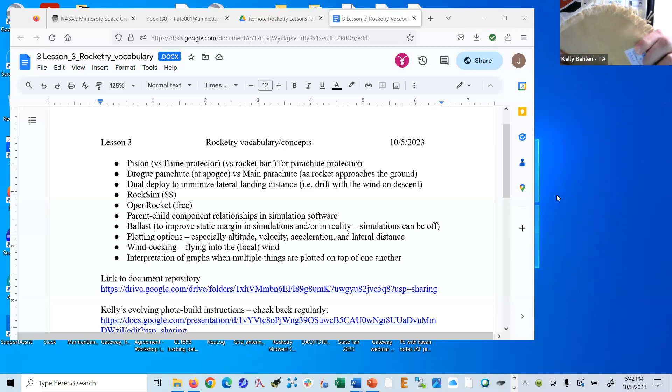You know, I actually have a flame shield right in front of me here that ejected at 1,000 feet per second velocity, and it barely survived. It ripped the whole outer diameter of this thing apart. You can imagine this is really, really strong. You can imagine what happened to the parachute. I suspect the parachute is not in as good shape as that. It's in multiple pieces. Okay, fair enough. Not a good idea to pull parachutes when you're traveling at high speeds.

We're going to try and pull one parachute at apogee, when you're hopefully not traveling fast at all, maybe even zero, although you're almost always tipped over and going sideways a little bit. And then pull our second parachute before we reach the ground, but make sure that the drogue parachute is at least big enough to give us a chance to get the main out without breaking something.

Hey, Professor Flaten. Go ahead.

I imagine if a rocket is traveling horizontally at high speeds, that is a bad thing. And it also might end up hitting the ground at a high speed, which would be a bad thing. Like, wouldn't deploying a parachute, even if it's not intentional, wouldn't anything to get it to slow down and not hurt people and land more gently be a positive? Okay, that's looking at the glass half full instead of half empty or something like that.

But okay, what's going to happen is you're traveling sideways. You shouldn't be traveling sideways at high speeds. That's called a missile, not a rocket. But if it happens, it's true. What does NASA do if their rockets are not rockets but missiles? They send a self-destruct command. And that's kind of what pulling a parachute does, is it makes the rocket blow up or into pieces.

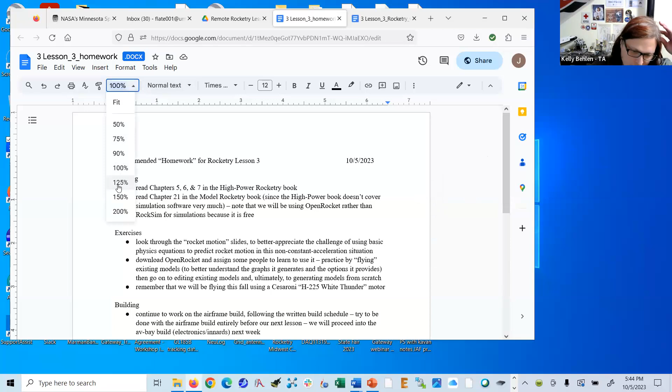Yeah, we had a motor failure where the motor kicked out. It turned over like it was at apogee, and then the motor started burning again. Motor started up at maybe 400 or 500 feet. When it hit the ground, it buried the nose cone about 8 inches in the ground, and it shortened the rocket by about a foot. So you always want to try to keep these things pointed up.

On the other hand, if you don't manage to get a parachute out, it will come down gravitationally at a very high speed, and we call that a lawn dart. I remember one lawn dart that literally disappeared underground, but there was a beeper on it, and we found it by going around and looking for what part of the ground was beeping. That was impressive. We got the rocket back. It was not in good shape, but we dug it out.

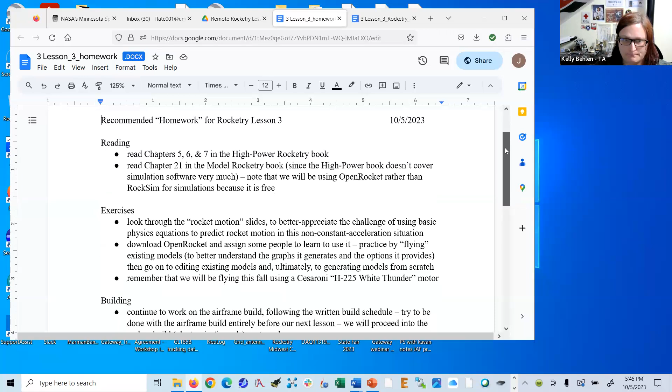It was fully underground. We found 7 pieces of one of these, and we only recovered half of it. So that gives you an idea of the kinetic forces. That's why they tell you to never try to catch a rocket coming down also, because it can hurt you quite bad. Okay, pressing on, and then I'm going to turn this over to Kelly to give us an update, and then I'm going to do some theory.

So here we go. For reading, there's several chapters in the High Power Rocketry book I want you to look at, and also chapter 21 in the Model Rocketry book. That's the chapter on simulations, although it's not Open Rocket, but RockSim. It's similar. For exercises, I'm going to show you some rocket motion slides very quickly. I would encourage you to spend more time than I do tonight looking those over.

And then get a copy of Open Rocket, download it, get some people on your team, maybe more than one, to practice using it. And we're going to develop the beginnings of a simulation model of your rocket. And the homework more or less for this week is going to be take that model and make it look like your real rocket and show us in about a week's time how it's going. We will be flying with a Cesaroni H225 motor, and so that's the motor we'll be putting into our simulations.

As far as build, you should be building your airframe, and we're going to start building the AV bay next week, so it would really be nice if the airframe was essentially done, or close to done at least, before next week. That's all I got as far as homework and vocabulary concepts, so that was actually very quick. And I'm going to stop sharing and turn this over to Kelly for a build update.

Is screen sharing enabled for me? Here's what I'll do. I will spotlight you. Okay. I need you to turn on screen sharing so I can show them Open Rocket. Oh, if you click on screen sharing, it doesn't let you? Yeah, it's disabled by you. You have to enable it. That's bad because I don't remember how to do that. Anybody? It should be on the little taskbar down there. There should be a little chevron that you click, and it says enable screen sharing for all participants. I'm looking.

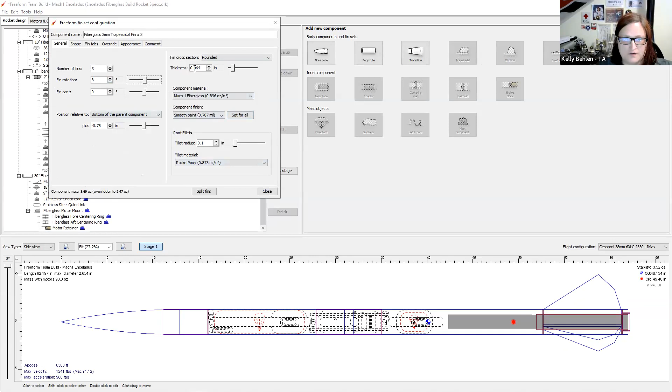Where you're really going to see a lot of this stuff is in the thickness of your fins, the fillet of your fins, what material you're using, and whether you rounded it, squared it, or had an airfoil on the front of your fins. And the last thing you're going to see in this program is where you actually design your fin. So that's going to be important.

You're going to need to get not the root edge, but the root edge of the exposed part of the fin. You're going to need to find out where that starts, where that ends, and the XY coordinates of all of the parts. You'll see them over here. I had this in millimeters because the kit was in millimeters. So you'll see that there's slight variations, but typically it's 6, 3.7. And that's how you're going to track your fins.

When you go over to the third tab here, fin tabs, this is where you're going to change the length of your fin tab and how tall they are inside of the body. So you're really going to just do the top 3 here. You're going to put in your general information about numbers. You're going to shape it out. And then you're going to put the depth of your fin tabs and how long it is. Don't use this information here, obviously, because there is no correlation beyond 3 fins and what we're using. There's a lot of differences here. But this is essentially, if you're going all out, what you'll get.

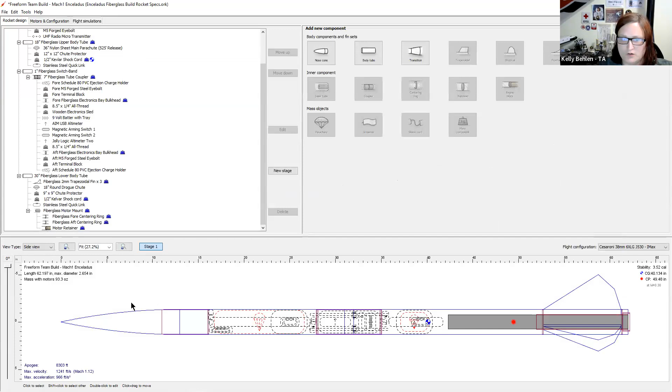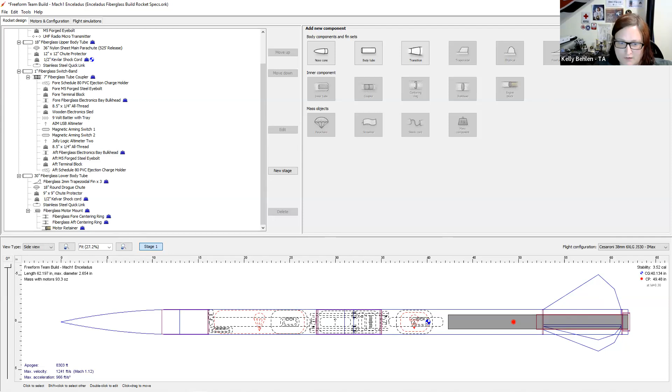You'll get a motor tube, the motor mount tube, the retainer, well, in our case, there's going to be 3 of these centering rings. Fins, you'll get your parachutes with your cords, your nose cone, upper body tube, lower body tube, and all of your avionics bay stuff. So that's what we've got going on there. Let me get back over and stop sharing that.

Let me just make a quick comment. That's very impressive. Turns out that we're going to do less. You can do all that if you want to, but we're going to allow you to do less. You just have to capture the essence. So in other words, there is a coupler and it's got avionics and it is about 6 ounces.

That's good enough. You don't have to necessarily draw out every single piece inside of the avionics bay, but by all means, you certainly could. And if you did so, it would be a better model still. I forgot to show one more thing.

Right here, if you look closely, you'll see what looks like a BMW logo. That is your center of gravity. That is typically where you want to put your rail button, your upper rail button. Your lower one you want back here, but out of the way of the aft centering ring. And your front one you want right here, slightly in front of that.

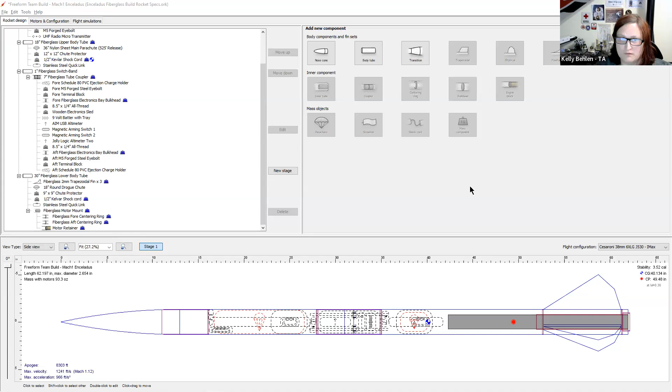So that's what this is really going to be really good for, is figuring out exactly where we need to put that rail button. So you'll see I don't have mine on yet because I haven't finished all of my calculations in here for our current model. So just keep that in mind. You're not going to put that on until you have a good model.

As far as the build has been progressing, what we end up having right now is, if you've made it to the end of the slideshow, you're going to have your 3 fins in. They should be filleted. You're going to have your rail button, and you're going to have your back centering ring. I haven't put any fillets in here yet. I plan on using the JB weld in here as a heat material. But you'll also notice that my standoffs, I went ahead and got some aluminum for the standoffs.

So when I said to measure an extra 9 millimeters here, what that 9 millimeters is basically where my finger is. That's going to be this little part right here, that little black band. You don't have that. This is a spent 225 cartridge, and that's 9 millimeters thick. So when that's slotted in there, it makes up that difference. So that's part of the calculation you're going to need to do.

So you really want to start to get these fins knocked out. You want to get the fillets in there. This white stuff here is just to make it so there are no wrapping bands. I like to have smooth on there. And you're also going to want to make sure you've got your knot on. Oh, that's swinging a lot. Your approved knot on the end, maybe a quick link going on there.

You're going to want to have your nose cone done with the eyelet in there. You can cover that back up if you want, but some people are going to put some things inside of here. So if that's the case, you're also going to need to drill a hole in here to make sure that the pressure is equalized between outside and inside. So you can leave this open for that reason. You'll have to tape over this in flight so that all your stuff doesn't fall out. And that would be a good place to be settled right there.

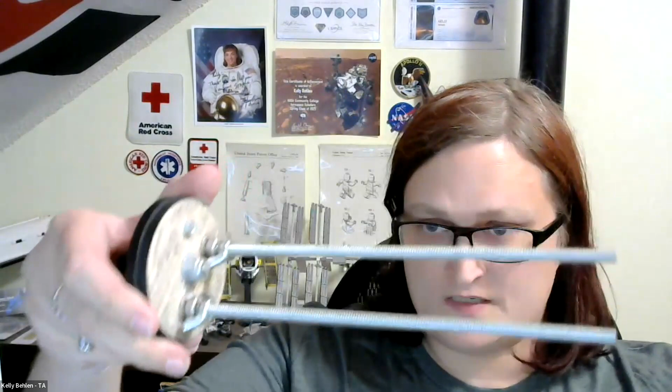And I'm going to take this off so you can see what that looks like by itself. The other end is going to be connected with wing nuts. So you can just hand tighten those and you can put the other face on. So essentially what you're looking at is you're looking at this as your whole rail. Ignore these wing nuts. I'm using those to shorten my board slightly so it doesn't jostle around in there. We'll get to that later. But you're going to want to have one of these, and you're going to want to have one of these.

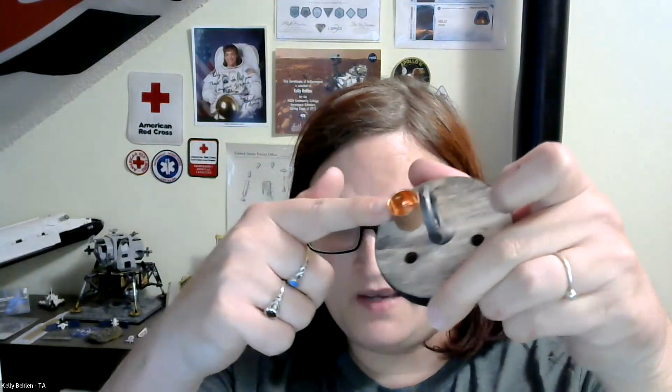You'll also notice, you might have quickly noticed, that I went through the whole thing with the bolt there and the nut. I've had some bad experiences where these things have jumped right off of the bulk plates, and I don't enjoy that. So I bolt them straight through now.

You will want to have your board itself done, but not the electronics on the board. So you're going to want to make sure that you have something where both of your sets of holes will go all the way through. If you notice, like I was saying, I'm limiting this.

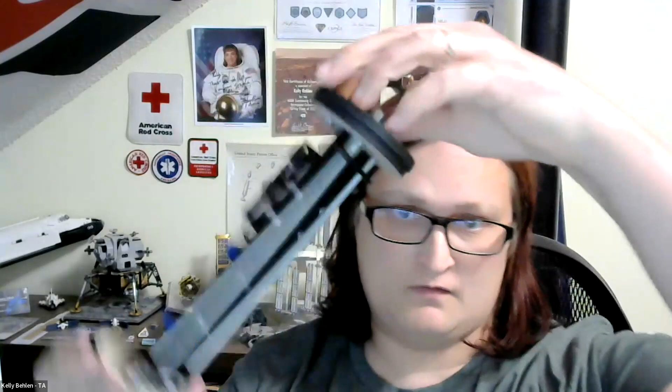If you look under here, it sits right up against those 2 wing nuts. And I use wing nuts because they're a lot easier for me to control the depth on those. The front end of this, when you put the other cap on, you can see it sits real nicely in there. And then I don't have to do anything. That's the exact length of my avionics bay.

You'll also notice that I am using my own custom 3D printed battery holder as opposed to the one that's given to you. However, one thing that is consistent about these is the position of the battery. When this is accelerating, that battery will be forced downwards. And so both of the terminals will stay in contact with the 9-volt. They won't separate out. So make sure you're doing that.

And one of the last parts that I have that I've been working on, well, 2 of the last parts. One, I've got my piston, and you guys may have this all worked out, but I've also gone ahead and done my quick links for my parachute and for the nose cone and going down to the avionics. So it's kind of a whole string. Kind of hard to get this into one picture here.

How did you get so many quick links? I didn't give anybody else that many quick links. No, you didn't. I went and bought some of my own stuff. I like creating a little piece of art out of these things.

Okay. And another thing that you will see is, like I said, you have to equalize the pressure. So I've got a hole in my upper body tube that is going to not interfere with where my nose cone sits. And that way I can drape some things from my nose cone into the body tube and they will equalize through there. On the bottom, those are the rivets. You might have been wondering what the rivets are going to be like.

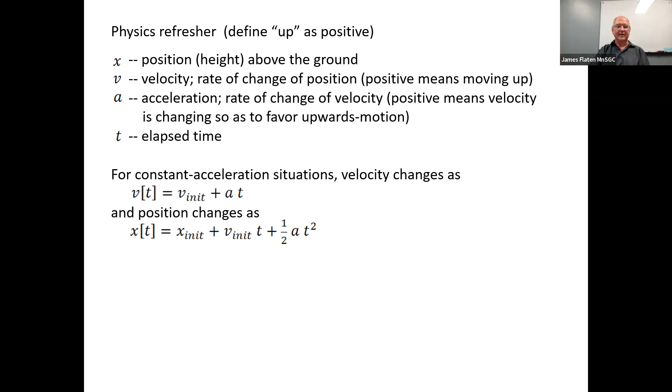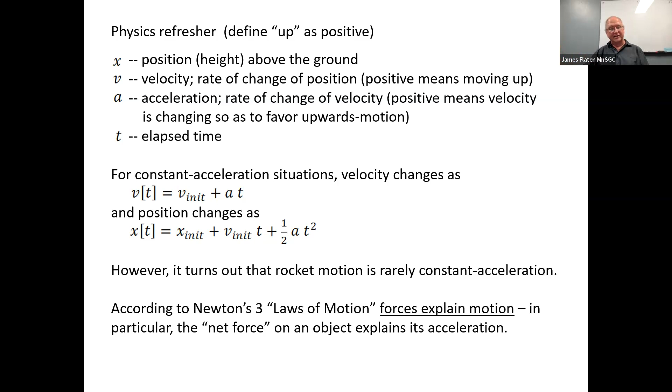This hopefully is familiar. However, rockets don't move with constant acceleration, so there will be limited utility to these equations, unfortunately. Remember there's Newton's laws, and Newton's laws say that forces can be used to explain motion. And if you add all the forces together as vectors, you can explain the acceleration as long as you know the mass. So here are the three diagrams.

So here's definitions. I need to turn something off on my screen. It's blocking my view. One moment. Hide video, hide floating meeting controls. There we go. Okay.

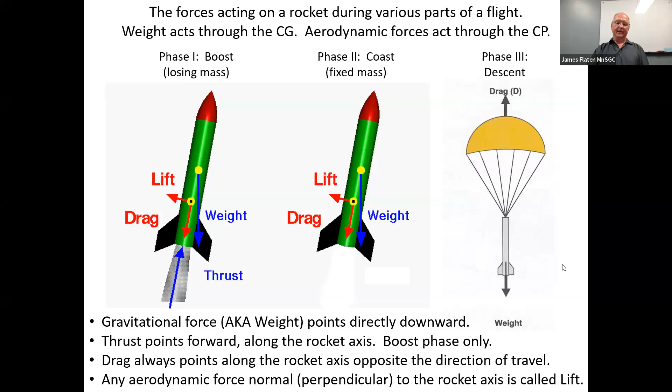So I already sort of defined those things. Spend some more time with these slides, please. Let's just take a look at Newton's laws. Newton's first law just says that if the forces happen to be balanced, your velocity will be constant. And Newton's second law says if the forces are unbalanced, then you can figure out your acceleration by adding the forces together, dividing by the mass, and that will give you your acceleration.

It turns out that that's not what Newton said. Newton actually said changes in momentum are explained by the sum of forces. And so this F equals ma, or sum of F divided by m is equal to a, really only applies if m happens to be constant. But Newton had a sort of bigger version of that, and his was more appropriate in some sense. But this is what's usually introduced in a basic physics class. Here we have changing mass, as well as changing force, as well as changing velocity, as well as changing drag. It's very complicated. Newton's third law just says when objects interact, both of them get forced in opposite directions. That's important, of course, but not so much for the calculations we're going to do.

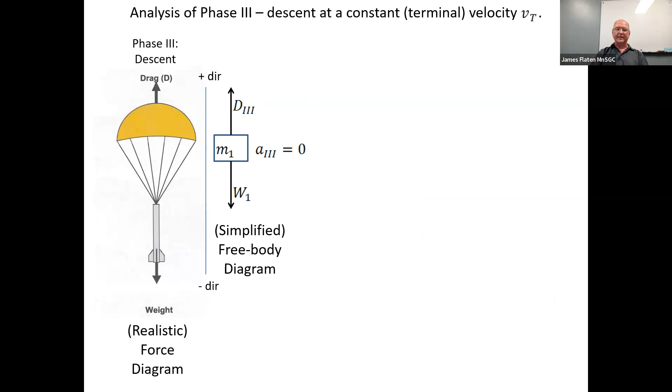Let's look at the third phase, because this is by far the easiest one, okay? So in this case, the drag upwards force actually will equal the weight downwards force, so you will travel at a constant speed, a constant velocity downwards in this case, called the terminal velocity. Here's how you might draw a free body diagram with two forces in two different directions. The acceleration is 0. You're not changing your speed. The mass is the burned out mass, shall we say. And the weight is related to g as W equals m times g.

And the drag force is related to a few things. In this case, it's related to the density of the air. It's related to the velocity, the terminal velocity, and it's related to the area of the parachute. That's what's causing the drag, as well as a coefficient, a drag coefficient. So I'm calling that C sub D, drag coefficient. But then I say P, and the P just means this is a parachute, because later there's going to be a coefficient of drag associated with a rocket.

And so in this particular case, V is the terminal velocity, A is the parachute frontal area, and C sub D is typically between 1 and 3. It depends to some degree on the shape of the parachute. And then, of course, the area of the parachute is also important. Density for air is known, and we're not going so high that that density will change very much, at least on these flights.

You're going to apply Newton's laws. And in this case, since things actually balance, you can either solve for the terminal velocity, if you happen to know things about the parachute, or you can say, I want a specific terminal velocity and solve for the parachute. In other words, you can use this kind of calculation to choose what's an appropriate parachute size.

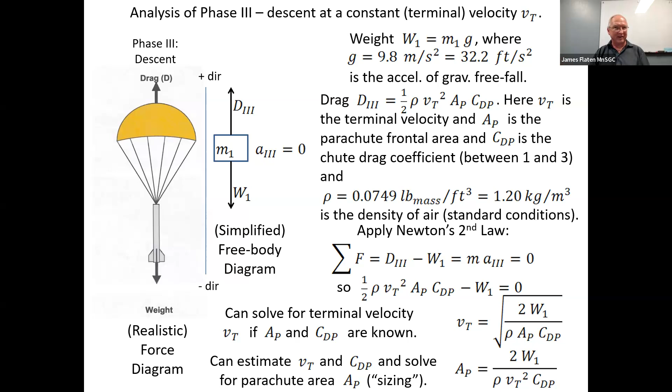So you can go either way. If you have a parachute, you can figure out how fast you'll go, or if you have an idea of how fast you want to go, you can use it to figure out what kind of parachute you should choose. Good news, all of this stuff will be done by the simulation programs for you, but I think it's useful to have some sense of what's going on behind the scenes.

Let's look at phase 2. This is more complicated. So now we're going up, but we're slowing down because of gravity, and there's no thrust. This is the coasting phase. Drag is not constant because the speed is changing. Weight is constant. We're at the burned out weight. So here are two forces, both of them act down, so clearly we're accelerating down.

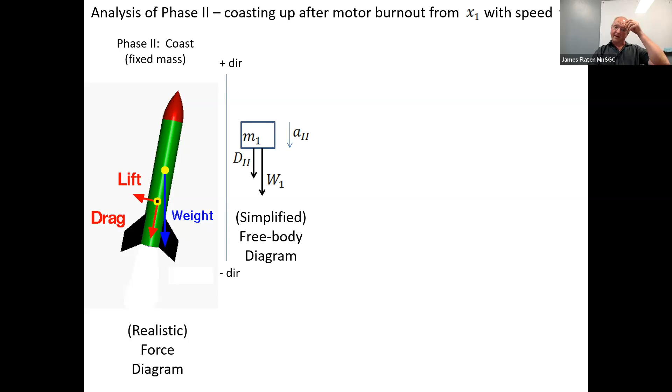And weight is the same, and drag is the same, except in this case, it will depend on your velocity, which will be changing. You're slowing down, and it will depend on the cross-sectional area of the rocket, AR, and the coefficient of drag for the rocket, CDR. And if it's a streamlined rocket, you might hope that some of these things are pretty small. So you might even dare ignore the drag. It's not a good idea, but that's about the only way you can make much progress in actuality. Certainly not a constant acceleration situation, because the drag is changing unless you decide to ignore it.

Okay, so here's how Newton's second law would lay out. And as I just mentioned, the drag is perhaps going to be small, and it will definitely be small once you start going slow. But it turns out that when you're going really fast at your top speeds, the drag is not small. It might even exceed the weight of the rocket. And so if you ignore the drag, you can do things like say, oh, this is just projectile motion of like a vertical ball thrown up, right? And you can say, I can figure out how high it's going to get, or how long it's going to take to get to as high a point.

But notice that this is from the end of the burn to apogee, not the beginning of the flight. So the bottom point in time and the bottom point in position is not the ground level. It's where were you when you finished burning, which is the end of phase 1. So you need phase 1 to know what are the input numbers to put into phase 2. Okay, but you can actually calculate how long you might coast if you ignore drag, and how high you might get from burnout to apogee.

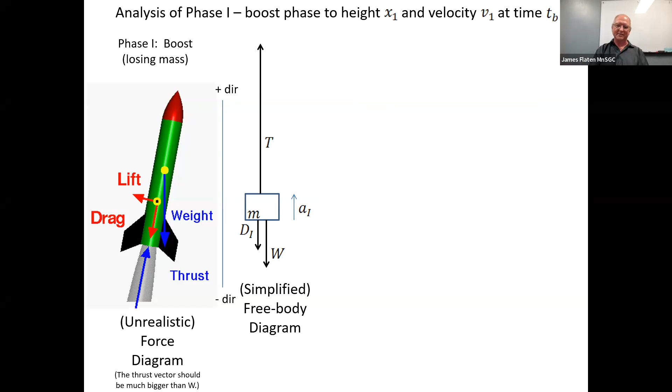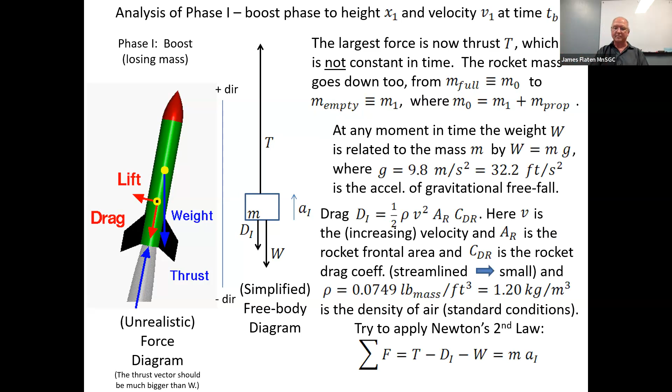Okay, so thrust is not constant, and the mass is changing, and the weight is changing because the mass is changing, and the drag is changing because the speed is changing, and many, many things are changing. And so absolutely not constant motion. You can try to apply Newton's laws, but you won't get very far unless you apply them little bit by little bit, as in a millisecond plus a millisecond plus a millisecond. Then you maybe make some progress. That's kind of how the simulation programs do it. It's very hard to capture this thing in a grand scheme as you might be able to do if it was constant acceleration motion. So I'm going to skip the next slide and go straight to a thrust curve.

This is a fairly typical thrust curve for an H125 motor. We're going to fly on an H125 motor. You can look up the thrust curve if you want. You'll notice that, can you see my cursor? You'll actually see the thrust curve too in OpenSim.

Yeah, but can you see my cursor? Yeah, definitely. Very good.

So notice that there's a spike early on. That's associated with how Cesaroni likes their motors. And then the motor backs off a little bit, and then it has an area where it's thrusting more and more and more as time goes on, and then thrusting less and less and less as time goes on, and then it dies out. Okay? So here's the maximum thrust.

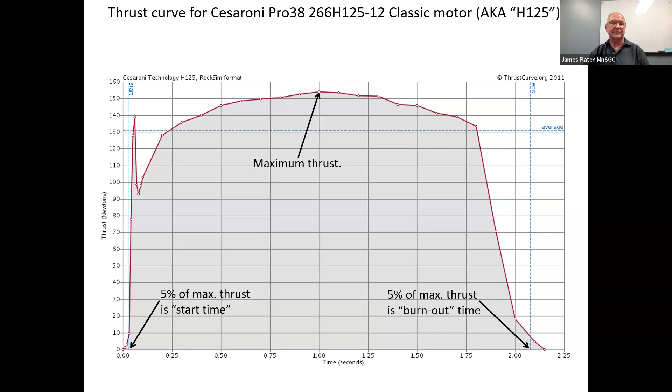We'll call the beginning of the thrust time or the start time for the motor 5% of maximum, as opposed to the very, very beginning. Similarly, burnout will be considered 5% of maximum. And so the duration of the burn is from just after 0 seconds to just after 2 seconds in this case. There's an average thrust. Basically, the thrust goes up and down, and so you can average that if you want to.

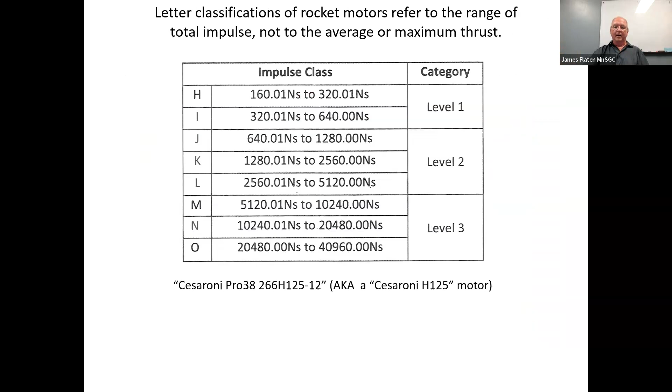Here are the impulse classes. And so we're flying on an H motor, but H and I are the motors associated with level 1 certification, JKL, level 2 certification, etc. The H125 motor, it's got all these details in the name. Cesaroni is who makes it. Pro 38 millimeter diameter motor, 266 impulse.

So notice impulse comes in Newton seconds, and the H class goes from 160 to 320, and 266 is kind of in the middle there. Okay, H is another much coarser version of what is the impulse. So H is a big range, and 266 is exactly where you are in the range. And then here's the average thrust in newtons. That would come from that previous figure.

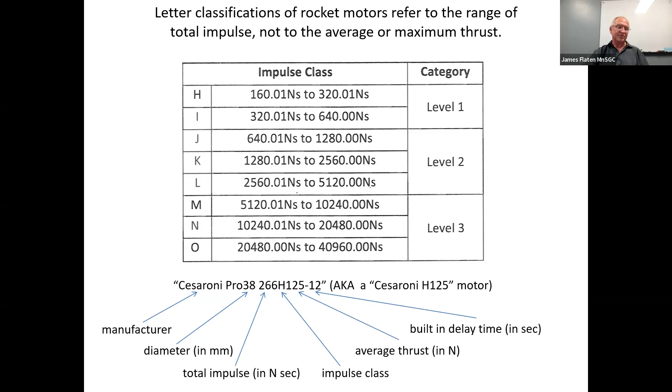And the delay time. This is how long it will be from the end of the burn up until the explosion goes off. And you can adjust that from 12 seconds to be shorter than that as you want to. One thing that's missing from this label is how long does it actually burn for. It's about 2 seconds, but that's not in the label.

I'm going to skip the rocket equation, and I'm going to skip these graphs and just go straight to here and say, often, too often, things like RockSim or OpenRocket will draw velocity, vertical position, and acceleration all on the same graph with multiple labels on the vertical axes. This can be confusing. We're going to see one of these in a minute, so I'm not going to spend more time. Just heads up, you need to be able to read graphs of this sort, and we'll look at one in a second.

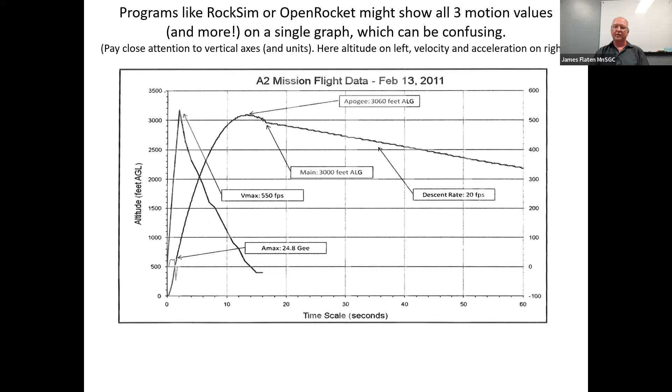Okay, here's what I want to do now. I want to spend essentially the rest of our time together tonight looking at OpenRocket. So I'm going to open up OpenRocket. And when you open it up, it just opens with a blank screen. And Kelly already showed you what one OpenRocket model looked like. Could you, when you open it up, show them the motor curve in there, how to access that? I don't know how to access it myself in OpenRocket. Can you tell me? Yeah, sure.

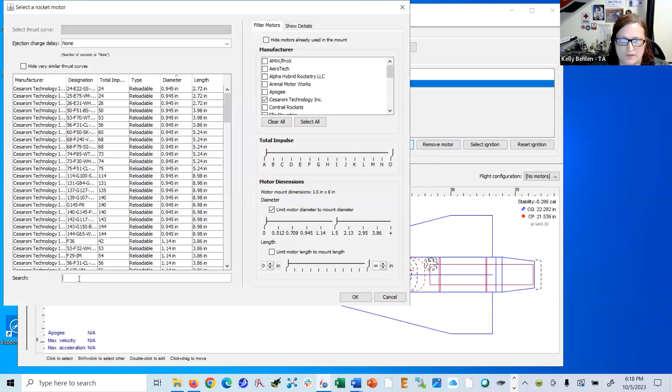Open that up, and then once you go into motors and configurations, when you go to selecting a motor right there, you have no motor in there. So down where it says no motors. Yep. Select a motor for that one. And then when you go in, you're going to be given a huge range. The easiest way to do this is on the right-hand side, where it says total impulse, narrow that down left and right just to H. I'm just going to type H125, and that will tell me exactly what I want.

So when you double click on that, go back in there, and you go to show detail up in the upper right. Never seen that before. Okay. And there's your thrust curve. Very good. I didn't realize it was built in. That's nice. Presumably there's a library that has this and all the other motors.

And so you can get a sense for the thrust curve. And in this case, there's a little bit of a spike at the end, oddly enough, as well as a spike at the beginning, and a fairly neutral, but not completely neutral curve in the middle. Thank you. I did not know that.

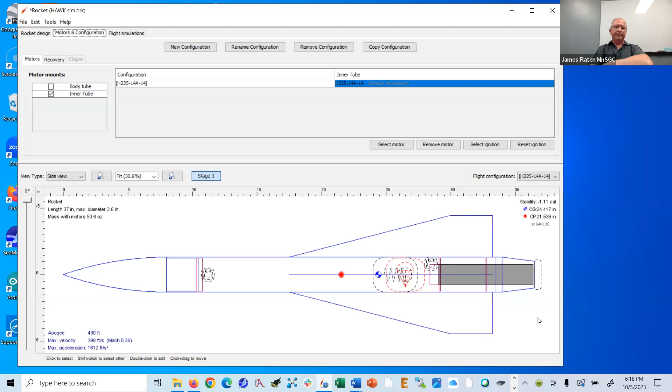Okay. I just want to point out this is a Hawk, and make sure that you are in imperial units. So under here, if you go to File, Edit, Preferences, Units, Default Imperial. Not that I love imperial units or US customary units, but all of the rules of thumb, like you need to be going 45 feet per second off the rail. It's not some number of meters per second.

It's 45 feet per second. So all the rules that you need to follow are all in imperial units. And so I would suggest doing your simulations in imperial units. If I look here, I noticed that there's a particular mass for this rocket. And then over here, this is very important. It tells me stability, and the stability is negative. So this rocket is unstable fundamentally.

That's bad. Were you going to say something, Kelly? I was just going to say you don't want to fly at 13.7 meters per second. I do not. Okay, so here we go.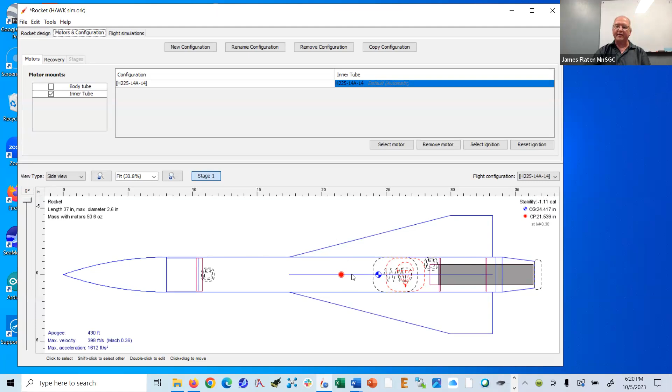I'm only going to do one thing with this model, and that is I'm going to fix that stability just by adding some weight to the nose cone. Right now, here is the center of gravity, and here is the center of pressure, which is even forward of the center of gravity, and hence the stability is negative 1.11. Okay, I'm going to go to the nose cone. Just as a reminder, the body tube diameter is your static margin.

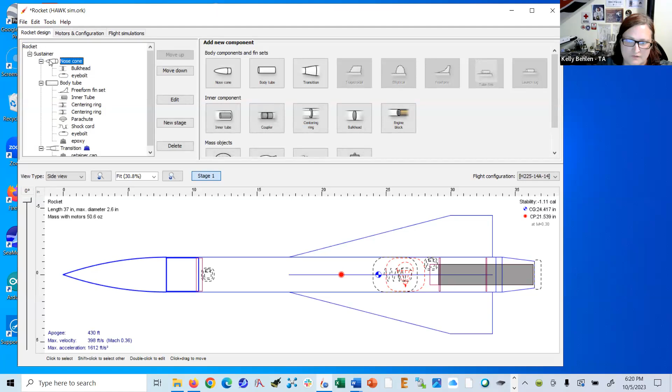I'm sorry, what was that? The body tube diameter is your static margin. So when you see negative 1.11, that's negative 1 and 11 hundredths of a body tube diameter. That's true. So we're measuring just the distance between these two things in body diameters. Okay. So what I'm doing is I'm going to the nose cone and I'm going to say, I just need to add a mass component, a mass object.

And as I increase the mass, notice that it moves the center of mass. So right now the center of mass has been moved to be on top of the center of pressure. And if I keep going, I can eventually get the center of mass to be forward of the center of pressure. And now I have a stability of 1.1. That's much healthier, but it took a full pound of mass to make that work. And notice that drew the mass way up here, which is probably unrealistic.

I can't actually get 1 full pound in the tip of the nose cone. And so I probably should move it at least inside the nose cone, just to be more realistic. And so I lost ground a little bit. But this is what Open Rocket, for instance, can allow you to do, is study issues of stability even before you build the rocket and just say, okay, I better modify, make something bigger, make something heavier.

In this case, you absolutely need to add mass to the nose cone. Otherwise, this rocket will tumble. It will not fly up at all. So it's an unusual rocket in that it's sold as a kit, but this kit is fundamentally unstable. You got to watch out for that. Our kit will not have this problem. May I add one point that is really important?

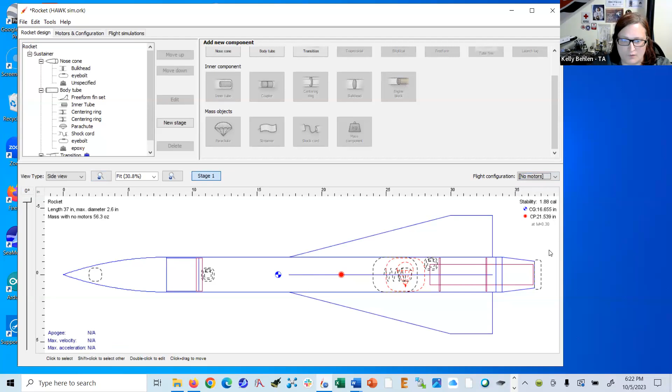Please. So if you're going with stability, let's say you get a nice, cool 1 stability, 1 static margin. That's not good enough. The reason 1 isn't good enough is because when that motor starts burning down, you're going to start to change your center of gravity again, and it's going to go under stability. So you need to make sure that you're aiming for somewhere around 1.2 at a minimum and somewhere around 3 or 3.5 at a maximum, in order not to weathercock or to get oscillations from having a non-valid static margin. It's good advice.

This is the stability at the moment of launch when the motor is full. But yes, the motor does get lighter, and that can change things. And sometimes it even changes things in your favor, especially if it's a hybrid motor. But for these solid motors, they get lighter, and usually you lose ground on stability. So anything positive is considered stable. Negative is unstable. Positive is stable, but between 0 and 1, that's marginally stable.

And if you start at 1, you're going to drift into the marginally stable area pretty quickly as you burn. Notice right now with no motor in, the stability looks pretty healthy, 1.88. But as soon as I put in the motor, it is less than 1 now. And the reason is the motor adds quite a bit of weight to the tail end of the rocket. That's typical.

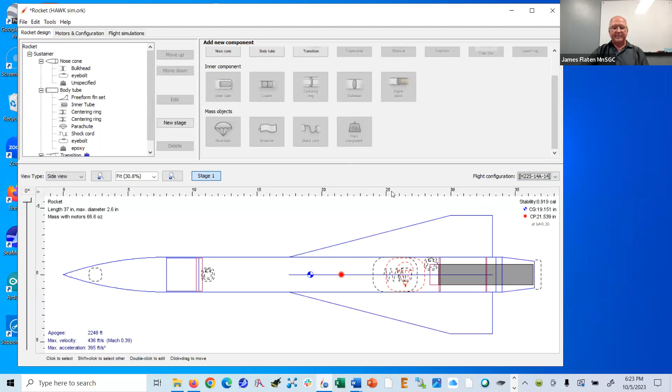So here's what we're going to do right now. We are going to start from scratch. So I'm going to say File, New. We're going to draw your rocket. Except I'm not going to actually draw your rocket. I'm going to draw something that looks a little bit like your rocket.

And you need to take what I'm going to draw right now. I'm going to call this the preliminary or the draft version. And you need to make it actually your rocket by putting in the right weights and the right lengths and the right, et cetera, et cetera. And I won't even get into all the parts because I only have 5 minutes. So here we go. Let me start to build a rocket from the top down.

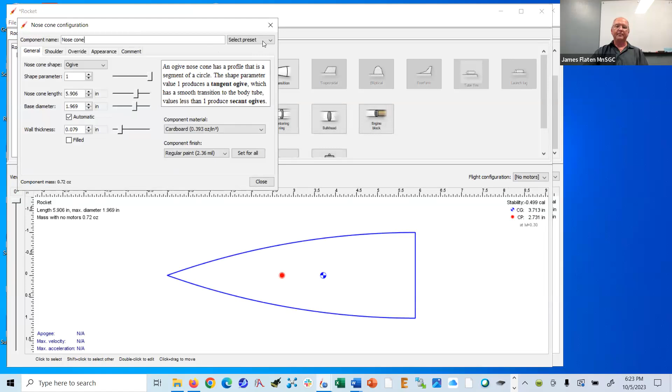So nose cone. Our rocket is a 3-inch diameter rocket. And so I'm going to go into a database and see if I can find myself here as outer diameter. I'm going to sort by outer diameter and find myself, there it is, a 3-inch diameter plastic nose cone. You know, I think I might go with a PML 3.1 inch. It's really the same thing. Different companies do or don't give you that last digit.

So if I choose that nose cone, notice there it is. It's got a shoulder. That looks pretty familiar. It's unstable by itself. That's normal. We're not going to fly the nose cone by itself. But now I have a nose cone.

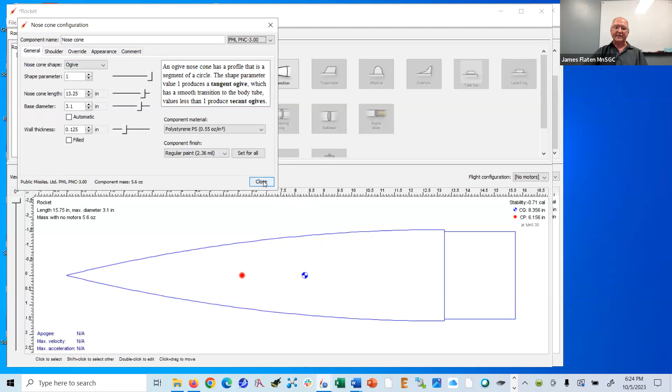And in fact, it says it's made out of polystyrene, and it even knows how heavy it is. But if you want to, you could potentially override the mass and the center of gravity. But I'm just going to leave it alone, assuming that the library knows pretty well what kind of nose cone this is. So, got it. I got a nose cone.

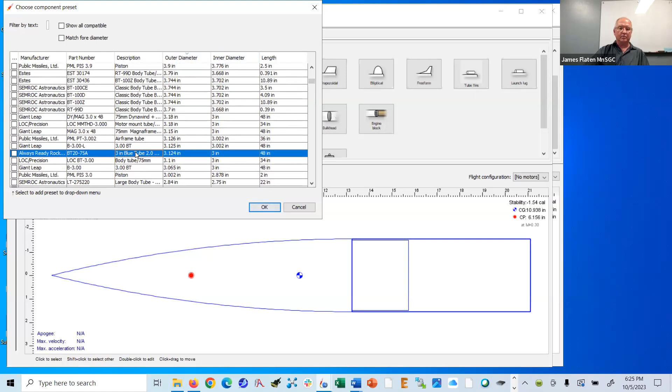Next thing I need is a body tube, an upper body tube. And notice it automatically drew the body tube to fit the nose cone and overlap the shoulder. That's good. I need an upper body tube that's made of blue tube. Let me see. Again, I'm just going to sort by diameters and look for 3-inch blue tube body tube. Here we go. There it is. There's a 3-inch diameter body tube. And it says, that's fine.

If you buy it from the company, it'll be 48 inches long. It's like, okay, I don't really want it to be that long. So let me just reduce that. I'm going to reduce that to 18 inches. Is that right? I don't know. I did not measure it. You have a rocket, you can measure it yourself. But for starters, that will do.

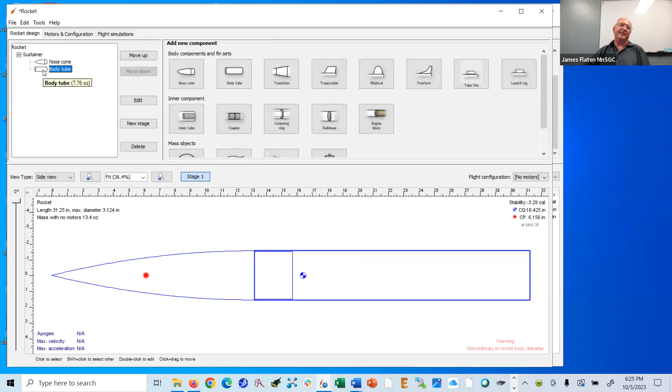And then I'm going to click on body tube and say, here is something that is a child of this body tube, and that's a coupler. So I want a coupler that fits inside. So let me go looking for a coupler from a database. Again, I'm just going to find one that will fit inside of a 3-inch body tube made of blue tube, and there it is. Blue tube comes from Always Ready Rocketry, so that is in fact the right thing. And it turns out that it's 8 inches long.

That looks okay, except it needs to stick out because right now it's all inside of the upper body tube. So I can drag it around, or I can type in. In fact, I want it to stick out halfway. So if it's 8 inches long, I'm going to make it stick out 4 inches.

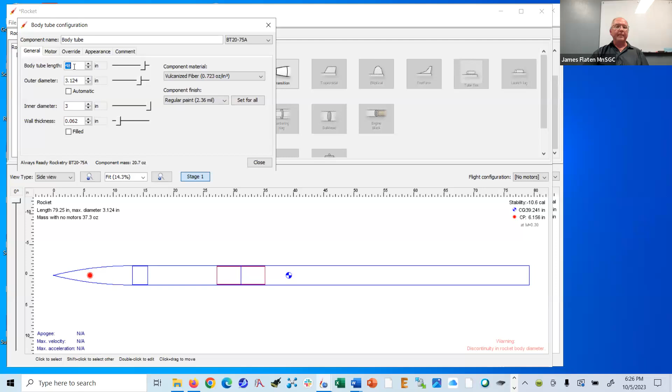Fine. Next up, I need another body tube. This is my lower body tube. And let's find one. Again, I'm looking for that 3-inch blue tube. Where is it? There it is. Okay. 48 inches long. Again, I don't need it to be that long. I'm just going to make it 24 inches. Again, that may or may not be correct, but you can correct it if it's not. And it knows that it's blue tube, vulcanized fiber, that's what they call it in this program, and hopefully they have the mass per unit length correct.

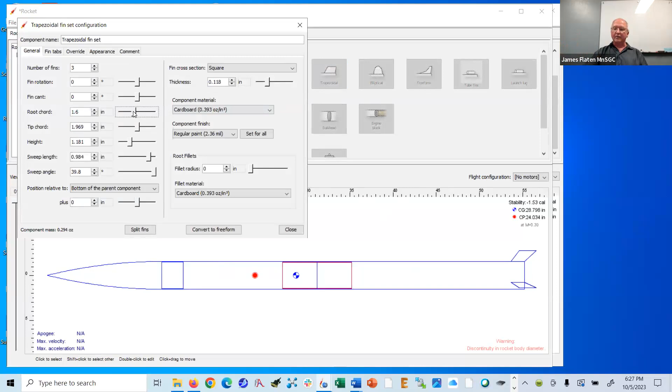Now, in that lower body tube, I need some details. For instance, I need some fins. I'm going to just go with trapezoidal fins. I'm not even going to freeform them the way Kelly was showing you. So in these trapezoidal fins, I can draw things that are longer, and I can draw things that are taller, and I can draw things that have more or less of a tip. Is that right? I don't know.

It's not terrible. In fact, you could do better, and you should do better, but I'm just going to start with 3 fins that are this shape, and I'm going to say that they are made out of wood, maple, and I'm going to say that they are 0.25 inches thick.

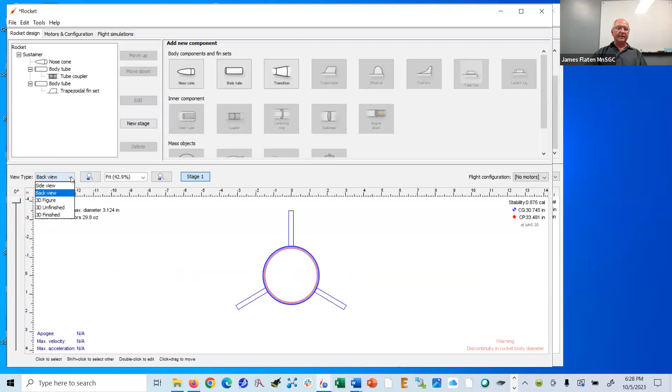And I'm not going to bother trying to curve them or anything fancy. Don't forget your fillets. I'm not going to do fillets. I'm not going to do lots of details. But there is a place to do fillets. I'm not going to do them. On the other hand, I'm going to take a look at the back view and notice that I can look at the view of the rocket here. So in other words, there's different ways to see this rocket if you want to, some of which are more and some of which are less realistic. I'm going to do all my drawing from the side view where I can see inside.

Notice that I have not put any end caps on my coupler tube. I have not put a forged eye bolt here. You can do all these things. I haven't put any parachutes in it yet. I better put at least one in a moment. Otherwise, it will crash when I try to fly it.

You also have a very important error, Dr. Flaten. What's that? You have a body discontinuity in diameter. I don't know where that's coming from. So I do all my measurements by hand. I just told it to automatically fit the parts together, so I'm not sure why it's complaining. Yeah, so one of them is 3.124 inches. If you click up on body tube up there, double click on body tube. This one? Yeah, either of them. So your outer diameter is 3.124. Click on the other one. 3.124. And what is your nose cone? There you go.

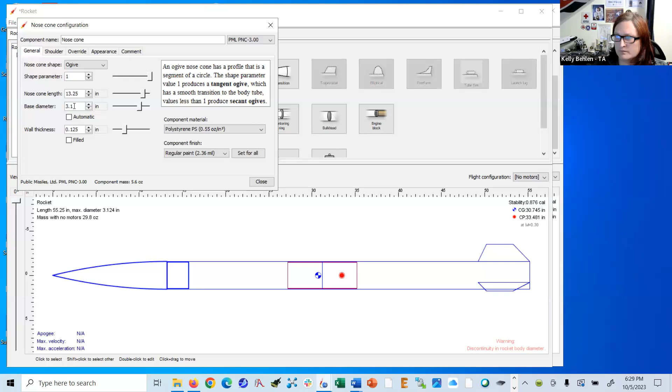Okay, so basically it pulled something out of a library that said 3.1 and pulled something also out of a library that said 3.124. I don't know if I can fix that or not. I guess I can fix that. This is just sort of a library difference of opinion from two different manufacturers. It's actually sort of important because it turns out that not all 3.1-inch nose cones fit. And so if you're buying Blue Tube, you might want to go to the Blue Tube company and see if they sell nose cones. Presumably they will fit Blue Tube. And if you go to a different company that doesn't sell Blue Tube, their nose cones might or might not fit. Okay, I do have to push on. Just give me a few more minutes, please.

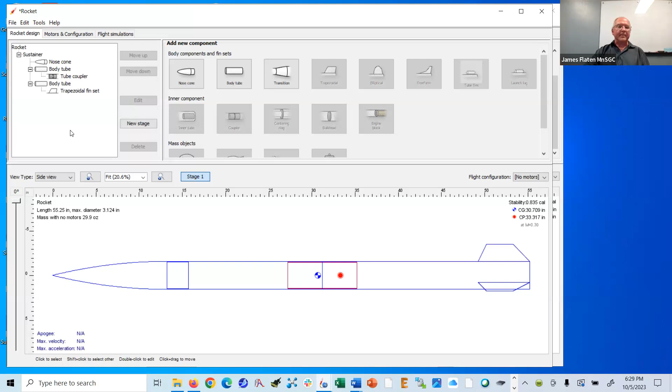Not many, though. I'm going to put inside of this body tube an inner tube. I'm going to say that this inner tube is 38 millimeter in diameter. And that's good. I don't need it to be that long. This is going to be my motor mount tube. So let me just say maybe 12 inches long. I think yours is longer than that, actually. Maybe. And I'm going to...

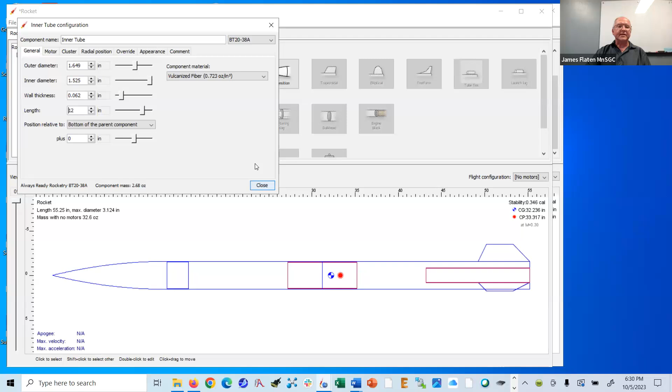Where do I get to say that this is the motor mount tube? But that's when I choose the motor later, I think. So go, nope, you're fine there. Go to the second tab up at the top that says motor. Yep. And this is the motor mount. Yes, good. Thank you. And I'm also going to name it motor mount tube.

I also made a comment in the chat, but I'm not sure every group sees that. For the nose cone, I would not recommend using polystyrene, as that's typically used for low power rocketry. We're going to want to use polypropylene as your nose cone material. It's going to have vastly different weights. Fair enough. I chose from a library, and so maybe what you're suggesting is also in the library.

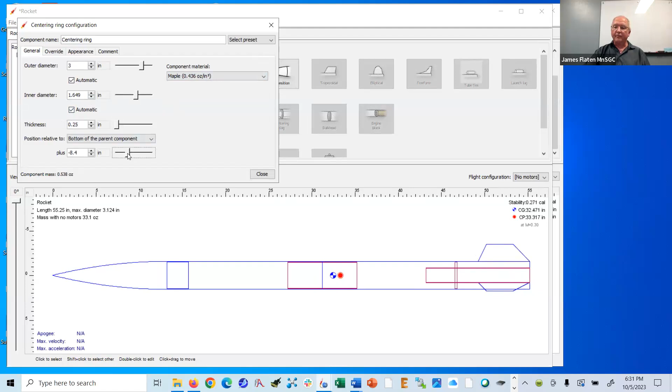I'm going to put on 2 centering rings here. Here we go. Make them 0.25. I'm going to make them out of wood. And I'm going to put one of them up toward the front here. And I'm going to make a second one. It won't complain if you don't do this, but this is realistic, so why not?

Maple 0.25. And this one is staying at the back of the rocket. So I have 2 centering rings. Yours actually has 3. And notice that I'm not doing too well on my stability right now. Once I add a motor, I will do even worse on my stability because the motor will drag my mass toward the back. And right now my mass needs to be farther forward.

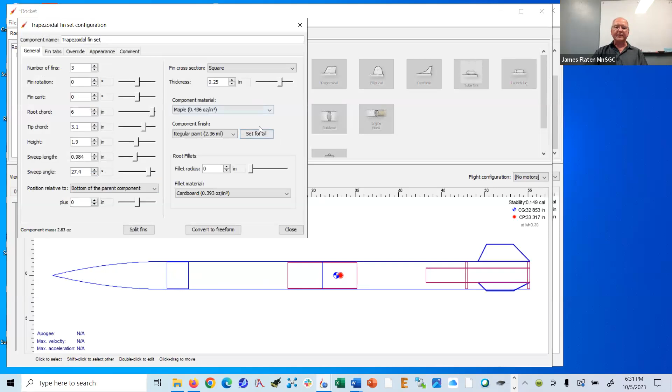Instead of adding mass up here, though, I'm just going to make my fins bigger. So I'm going to go back to the fins, edit the fins, and just make them a little bit taller. And notice, as I make them taller, it really sucks the center of pressure back toward the fins. And so hopefully your kit is fine, but I need bigger fins for this thing to actually work. Okay, that was pretty easy.

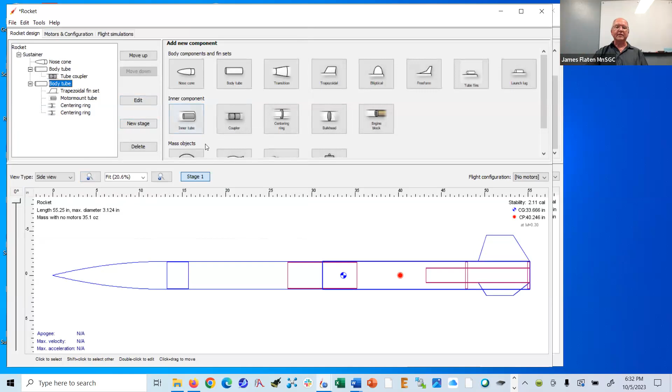I need to put in at least 1 parachute, and then I'm going to put in a motor and fly it, and then we'll be done for tonight. You need to finish this up with a second parachute, et cetera. So let's say we're going to put the parachute, a drogue parachute, into the rear of this. So I'm going to choose something goes in the body tube, the rear body tube. Let me say that the parachute is 15 inches in diameter. I say that because that's the size I gave you.

And I'm going to put this parachute down toward the bottom, right close to the motor. And the reason is that's where the parachute will in fact slump to. And I'm just making it sort of realistic in size. There's a parachute and it's down toward the base. And then I'm also in the body tube going to put a shock cord. The shock cord will be made out of tubular nylon. Let me try a 14 millimeter tubular nylon. Let me say that this is maybe about 15 feet long. Again, I think that's approximately what you will be doing.

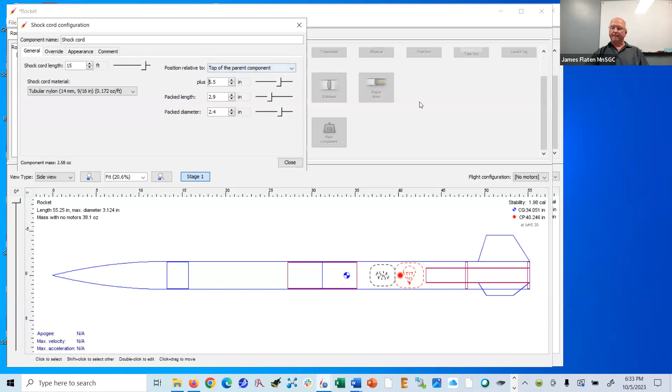And I want that to be sort of down close to the parachute, and that also takes up some space in the body tube. I'll set it right above the parachute. It does fit barely. Yours might not be so tight. You can always type in here. Let me just type in 5.5. Perfect.

Okay, and then here's one more thing I need to do with this. I better go back to the parachute and tell it, when is this parachute supposed to come out? Parachute, edit. When does it come out? At apogee. I could also have it come out on the way down, like at specific altitude, like 500 feet up. But I want this parachute, this is my drogue parachute, to come out at apogee. Now it's time for a motor. So it knows which is the motor mount tube. That's good.

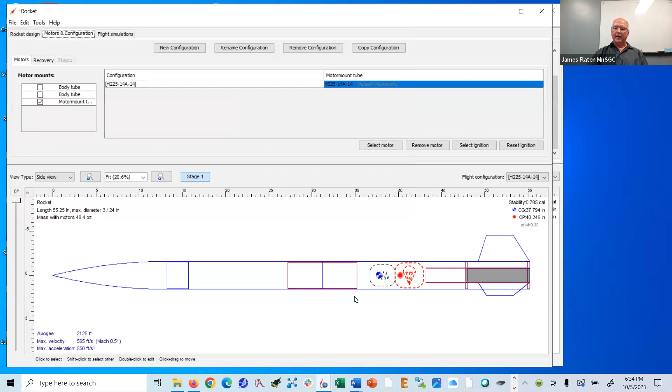I will select a motor, and I'm going to select an H225 motor. That's fine. And notice, as soon as I select the motor, it will draw it and it will change my stability from 1.98 down to 0.785. I'm going to live with that. I would like that to be bigger, but I'm in a rush right now. Let me simulate a flight. Flight simulation, new simulation. I'm going to leave the wind speed at just under 5 miles an hour.

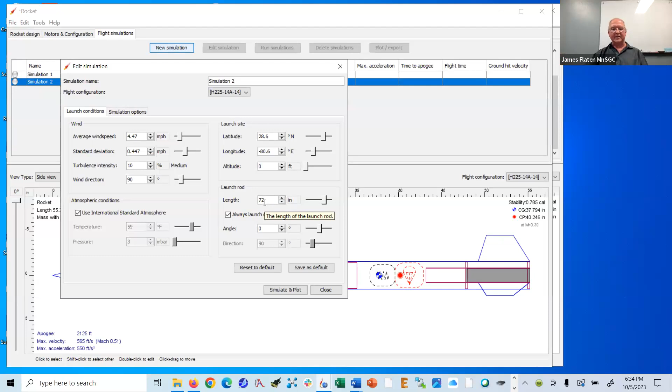This is important. You need to know how long your launch rod or rail is, and 72 inches is correct, but you might not have that in your thing. I think I had to change that and force it to stick. So 72-inch launch rod, because it needs to be going a specific speed as it comes off the launch rod. Simulate and plot. It's going to show me altitude, vertical velocity, and vertical acceleration, all versus time.

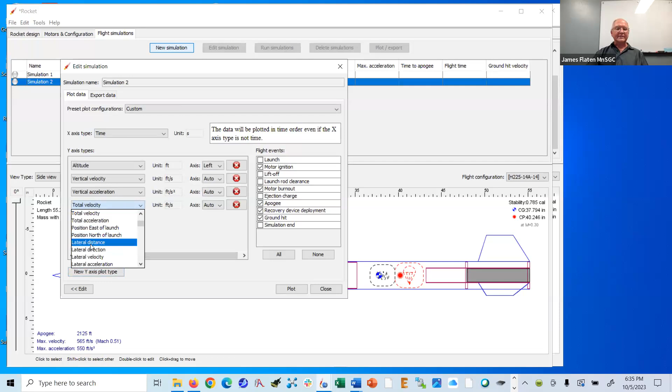Yes, Kelly? You can change the altitude to the field that we're going to be flying at. I'm not going to, but you can. Yes, you can actually give a lot more details, including wind speed and including latitude, longitude, and all sorts of funky stuff. I'm going to add one more thing to my graph, though. I'm going to add lateral distance. This is how far it drifts. Okay. When I say plot, it draws one of these multi-plots.

Velocity at deployment of the parachute, it was hardly moving because it was just at the peak of the flight. So that I want to be close to 0, and it is. This is good. It took about 9 seconds after burnout for it to reach apogee. So that's okay. I need to grind my motor down to that number.

This is a bad number. I want the thing to hit the ground going no faster than about 25 feet per second, and it's going almost 50 feet per second. This is why I need a main parachute.

So if I were to put a main parachute in, I would stick it up here in the upper section, and I would tell it, let the main parachute come out at some specific altitude, like 500 feet above the ground or something like that. And then it would come down at this 48 feet per second for a while, and then when it reaches 500 feet, it would pull a bigger parachute. Yours, I believe, is a 45-inch parachute. That's what I gave you.

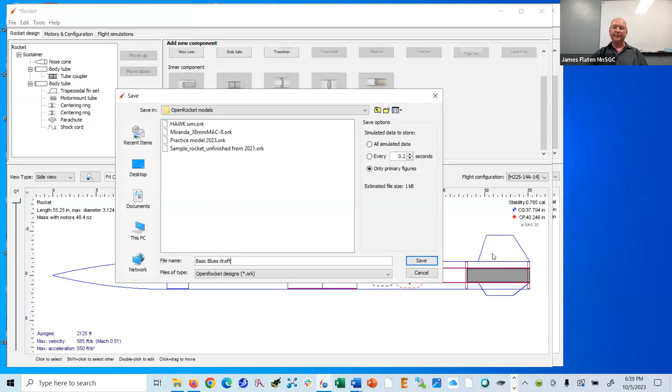I'm going to save this, just a second. I'm going to save this as basic blues draft. This is definitely not the real thing. I will post the basic blues draft. So everybody gets to start with this, but you need to fix this up and make it more realistic.

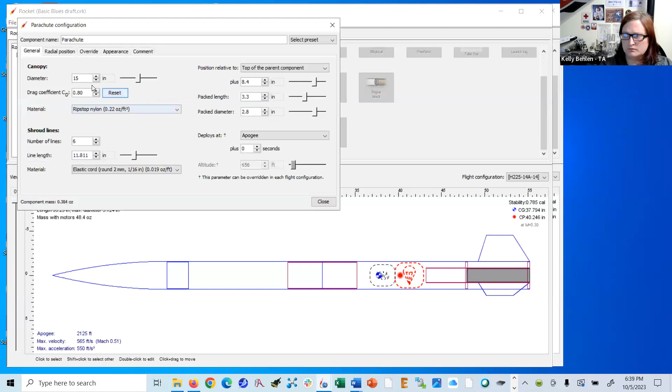Go ahead, Kelly. So can you go ahead and change that parachute to 25 inches and show them what ends up happening in the simulation when you have equipment that does not work? I'm sorry, this parachute? Yep. Change that to 25 inches or so. Okay, so right now it's at 15 inches. Oh, no, then change it to like 7 inches. Fine. And when you run it, you should get an error when you go back into flight simulations. It'll come down faster, but I don't think it'll give you an error, will it?

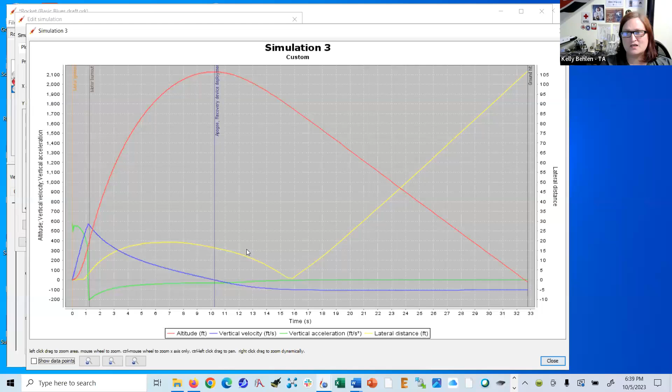When you have 2 parachutes, it definitely will give you an error if your drogue chute is too small; you'll get an exclamation point saying that you are popping a chute at much too fast a rate. Nope, that one's perfectly fine. But if you look, yeah, 100 feet per second into the ground. Right. So the idea is if you're coming down at 100 feet per second and then you pull a bigger parachute, you could easily shred it, and it may well complain about that. This does not sound prudent. Okay. But yes, indeed.

Watch this. If I go to the parachute, one thing for fun, edit, and say this parachute is not going to come out at all. Now let me simulate that flight. New simulation, simulate and plot. I don't understand that at all. I was expecting it would be totally parabolic.

And after that, it said, you're coming down with a rocket that's at least in pieces. You may not have a parachute, but this rocket is not very aerodynamic. And so it's going to calculate the fact that I slowed down. You should not do this. This is called drogueless descent, where you come down based on a broken rocket, even with no parachute. I didn't realize OpenRocket would do that. I was thinking if I said no parachute, it would let the rocket stay together. No ejection charge, but apparently it fires the ejection charge and assumes the rocket breaks and becomes less aerodynamic.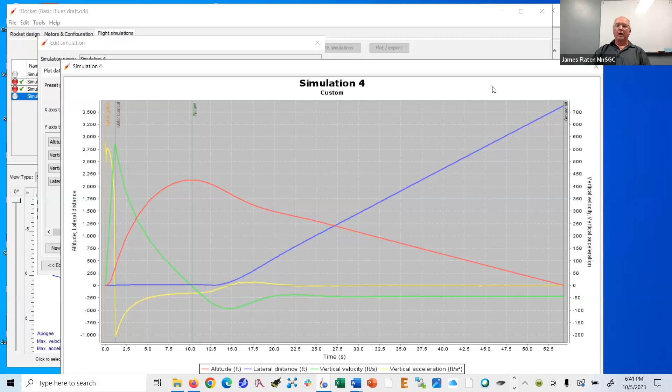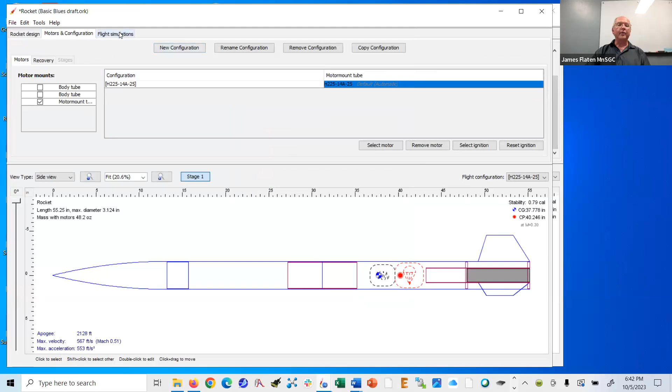And you can play with that. You can change the motor ejection timing. So if you really wanted to, you could just set the motor ejection time for like 25 seconds and it would set off after it's slammed into the ground. So here's the delay charge. Can you actually increase that beyond 14? I don't know. I've not really tried, but I'm assuming you can. So I changed the motor to say 25 seconds.

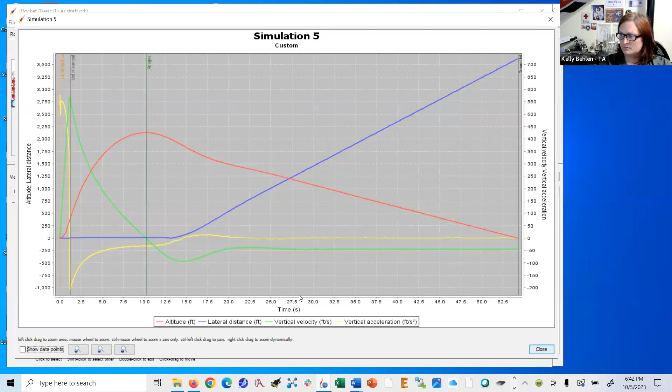Just for fun. What? No, I think it knows that this motor has a 14-second ejection charge and it will explode at that point. On the other hand, it's possible you might be able to turn off the motor eject altogether. You could also use a motor that doesn't have a motor eject. It's called a plugged motor.

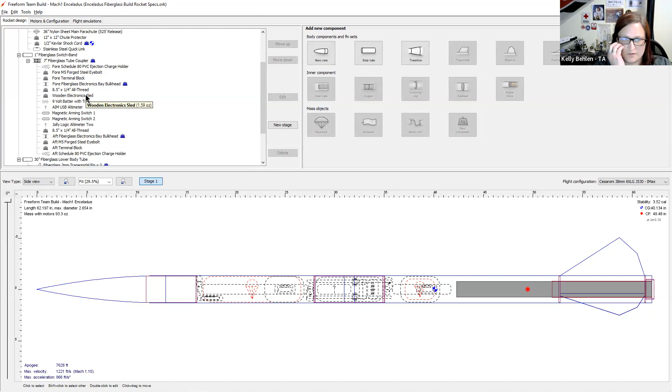Okay, can you rename the parts kind of like in SolidWorks? Yeah, so like if I want to call this 7-inch plywood avionics bulk plate, I can do that and it'll just automatically update there. And if you hit Control Z, just like you would Control Y and Control Z, you can see it's switching it back and forth. So Control Z works by backing out your last change in case you change something you don't want to. You can always hit Control Z.

I think it's good to use the part masses and maybe even measure the part masses to confirm them. This one was the particular case where we measured everything out because it was a Mach 1 supersonic rocket. So it was much more important for us to have these tied down completely and knowing exactly what everything is. But for our rocket build, the basic blues, it's not going to be nearly as important.

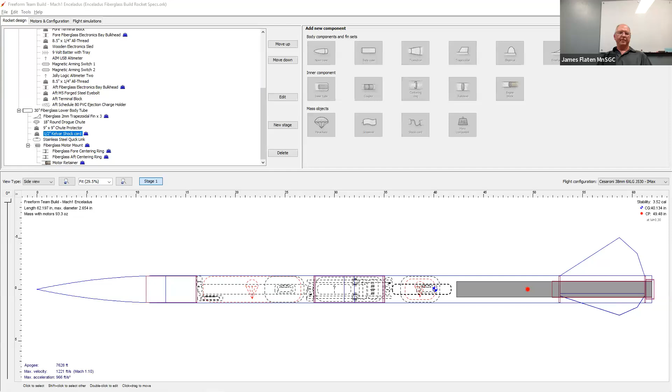Kelly, go to the top of this tree. Go back to that and go to the top of the tree. I want to show one thing. All the way to the top. And then click on stage. And say edit. Yeah, so the idea is you can override both the center of gravity, that would be based on balancing it with your finger, perhaps not with a motor in it, and then you can override the mass.

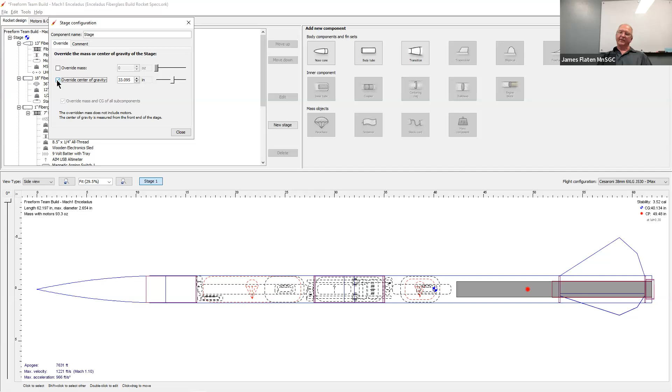So if you know the final mass and the exact balance point, you can actually just type in both answers there and not have it guess or estimate either one. And you can see how that shifts down there on the diagram. Yeah, so I see that it's moving a couple inches perhaps. And so it's like, it thought it was going to be here, but in fact, we know it's not, it's here. Yeah, you basically take everything in here with a grain of salt.

It's a free program and when I weighed the nose cone out and I come up with an overall weight of 5.36 ounces, that weight is not distributed over the whole thing. It's just kind of a center mass weight. And so it can be very hard for this to understand how that mass is actually working across the whole thing. So this was originally 5.74 and now it's 5.36. So just different things with that.

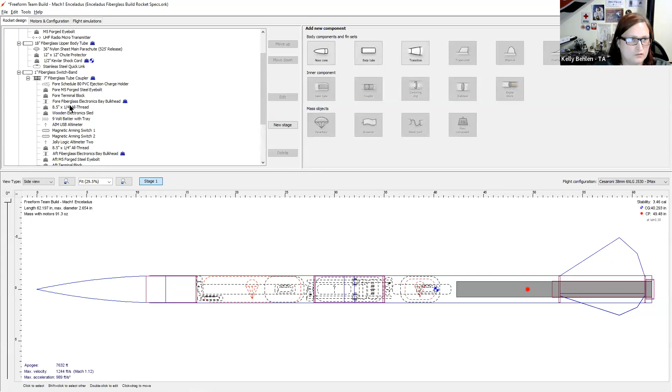What I was talking about earlier with the parachute is if you go into here and you change your parachute and you change your drogue to things that are not going to work, when you go and run your flight simulation, you're going to get a little warning here, and it's going to tell you recovery device deployment at high speed. And you can see that second warning. Don't worry about the first one. It's a supersonic thing. But the second one is 77.9 feet per second, which means that when your main parachute comes out, it's going too fast and could very well rip that parachute straight out.

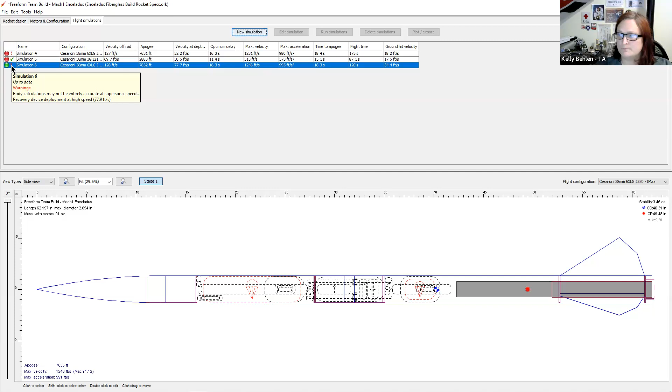Okay. Anybody else who's still on the line? Any more questions?

I have a question about the skid for the avionics bay. The sled, excuse me. Yeah, go ahead. When we design the sled, can we create the sled to have a tab and kind of notch out the end cap so it's a little more rigid and not so loose on the rails? It would be a good idea if the sled did not wiggle.

That's true. One way to do that is to make the sled length the same length as your coupler tube with caps on it. But if you do that, you might start to interfere with the nuts from the eye bolts. So that's why Kelly notched out for the nuts. It's a good idea that it doesn't wiggle, and there's a variety of ways to do that, including adding extra nuts to hold it in place at a very specific location along the threaded rod.

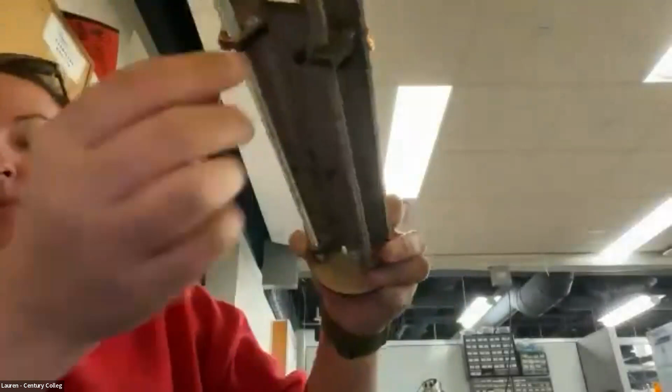You will find out the hard way that sometimes it looks good on paper and you can't actually do it that way. Yeah, I was going to use an example from a previous one. What we were going to do was use wood and have tabs that go down and sit on it. But as you see, they have a standoff that goes into the lid, which is what I was asking about. It's a little more work than really is necessary, but if you want to do it, you definitely can.

So it turns out, Lauren, that it's a good idea, but not the only way to approach it, to have the sled the right length from the get-go. On the other hand, if your sled happens to be short for any reason, including that you wanted it to be shorter, you can put nuts onto the threaded rod and screw them down until they hit the sled. Then it's the nuts that hold it from shaking, as opposed to the end plates.

Okay, and would it be a smart idea to also weigh the whole sled with the assembly? You have to. It's not a good idea, it's a required idea. Okay, I wasn't sure. You can't do that yet because you haven't actually built it and put all the parts on it. But that will be coming up. You will definitely want to be realistic in your model with how much avionics you put in there.

Okay, I just wasn't sure if you were intending on us self-designing it or having a CAD file of a 3D print design or something. We're going to tell you what has to be on it. You're going to have to figure out how to make it. If you have old rockets, you can look at what other people decided, but we're not going to insist on anything other than it has to work, and we'll tell you the functionality.

So the nice part about this one is that the rails are actually low down. They're below the axial line. So when you put the sled on the rails, you'll notice the battery doesn't sit too terribly high above the center point. In fact, part of the battery is going through the axial line. So it's not as bad as it could be, because some of these have it directly in the middle, and then your battery is going to be even higher up potentially.

So I told the guy who drilled those holes for me, why don't you set it up so the sled could potentially be right on the line, right on the midpoint. But if that's the case, then the components on the sled by definition will be high, shall we say. But you're right, it's, quote, not too bad. I would agree with that.

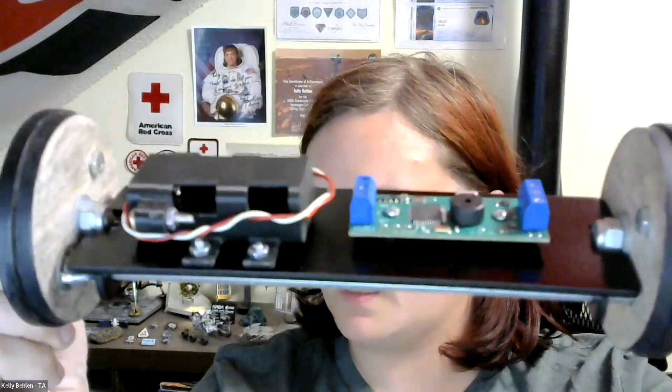Yeah, you just want to end up with something kind of like this. And you'll notice there's a standoff on this side; that's where I put my wing nuts to make up the slight difference. I didn't want it to be from end cap to end cap. I wanted to be able to adjust that slightly, but this is tight. It's not going to move around on me. So this will do exactly what it needs to do properly.

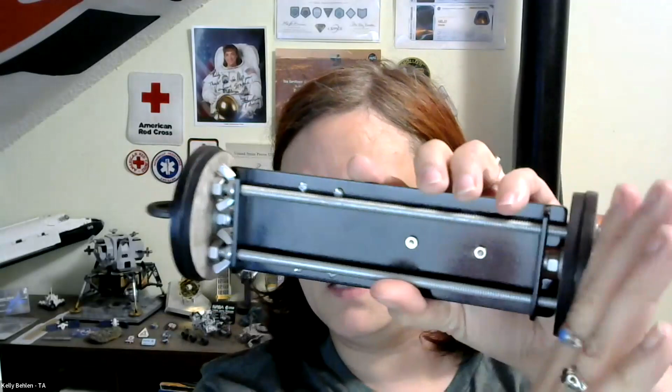On the other hand, is it tight when it's in the coupler tube? It certainly is. Okay, that's more important. Anybody can be tight when you don't have a coupler tube, but add the coupler tube and now it's loose. That would be a bad day. Yeah, that's what the two wing nuts are for, so I can adjust where this board is going to be in here compared to where the two bulk plates are going to be.

Okay, cool. Anything else? I think we've exhaustively covered it.

I do have to talk to you for a second after this, if that's all right. That's fine. Let me just stop this recording.